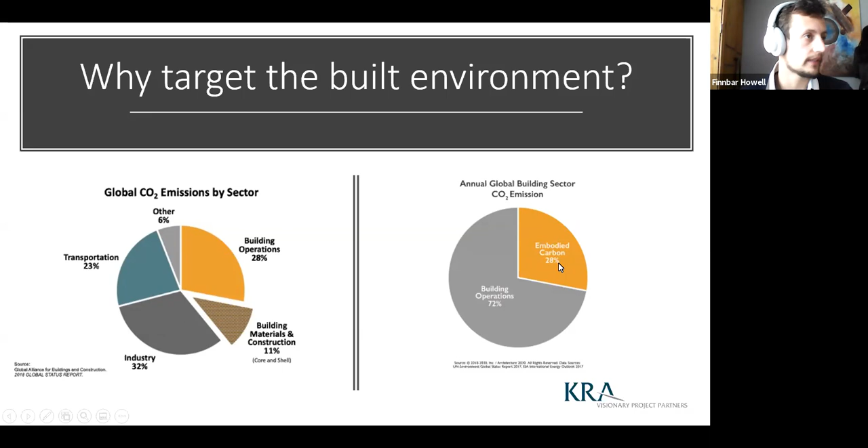So then we're looking at what impact renewables can actually have on this problem. The most important thing is a huge reduction in those operational emissions. And in terms of the macro sense of the problem, that is really what we're trying to do. But we also want it to be positive for all of the players who are involved.

So what else can it do? For the owners and occupiers of buildings, it can mean really significant savings on their energy bills, be that electricity or replacement of gas, or if they're currently using fossil fuels like oil, replacing those. It's typically a lot cheaper to do that through renewables. You're getting your green credentials, which is obviously helping the PR case for your business. You're protecting against the future increase in energy prices.

And the last point I have there, participation in energy markets. What I essentially mean by that is when we input renewable energy, we don't always control the way that it produces power, and sometimes there's a mismatch between production and consumption. So what's really important is that we'll then be exporting that energy to the main grid usually, and that means we're now a player in that energy market. For big users, when feed-in tariffs come in, that's going to be significant revenue streams, and how we're buying and selling power is going to be really affected by renewable energy.

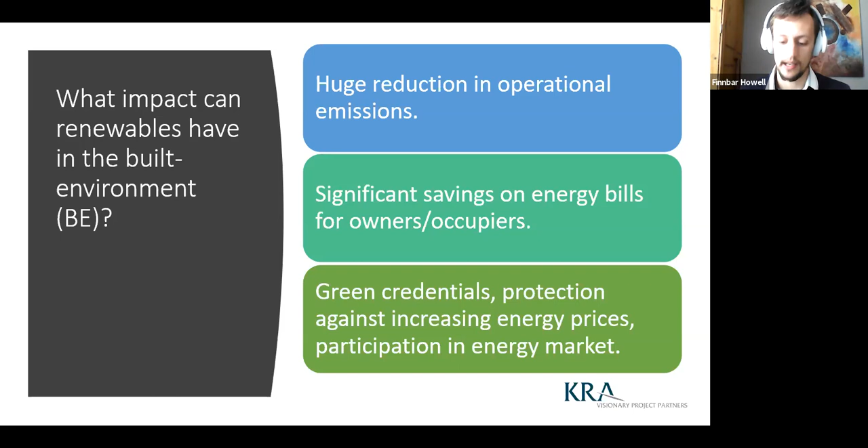So the next question then is just how we go about doing this - what technologies are there to implement these changes? There are a lot of different kinds of renewable energies, but for the ones suitable for the built environment, we basically have geothermal, biomass and its products, and solar power. Before we dive into those, a lot of people will ask, well, what about wind energy?

Wind energy is a really fantastic technology. It's doing great things to decarbonize the global electricity grids, but with the scale that it operates at, the technology and the economics don't really work for built environment specific installations of renewable energy. Likewise for a couple of other things such as hydropower and things like that.

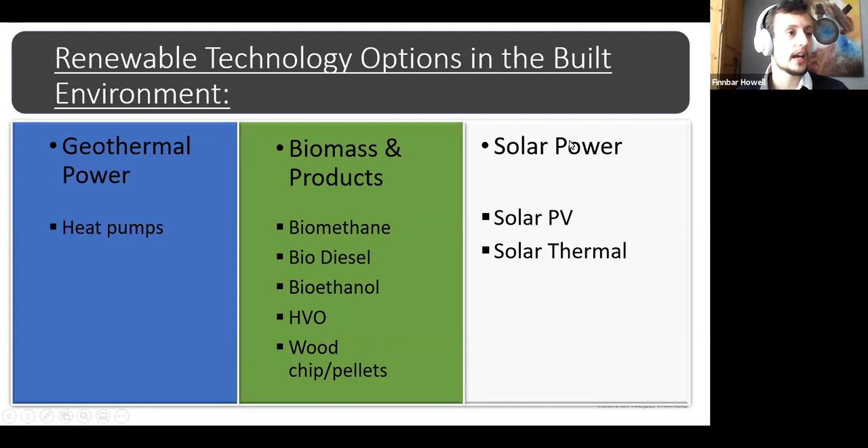So essentially we have geothermal, which we're going to be talking about primarily through heat pumps. There's also the possibility of vertical geothermal boreholes, but they're very case specific, so I'm not going to dive too deeply into those. Biomass and its products can be the replacement of gas, diesel, petrol, or other things. And then solar power, which we're mostly quite familiar with.

So let's start with heat pumps. What is a heat pump? To a lot of people it's just a random buzzword being thrown around a lot these days, or you might not have heard it at all. So essentially, a heat pump is kind of like an inside-out fridge.

Imagine a fridge that we're just running backwards, where our house is the inside of the fridge, or our building of any kind, and instead of pumping heat outwards as they do in a fridge, we're just using electricity to pump heat from outside in. So what that means is that a heat pump by itself is actually a very high efficiency heating device. It's not strictly a renewable energy device, and it's not completely sustainable unless the heat pump itself is being supplied with renewable electricity.

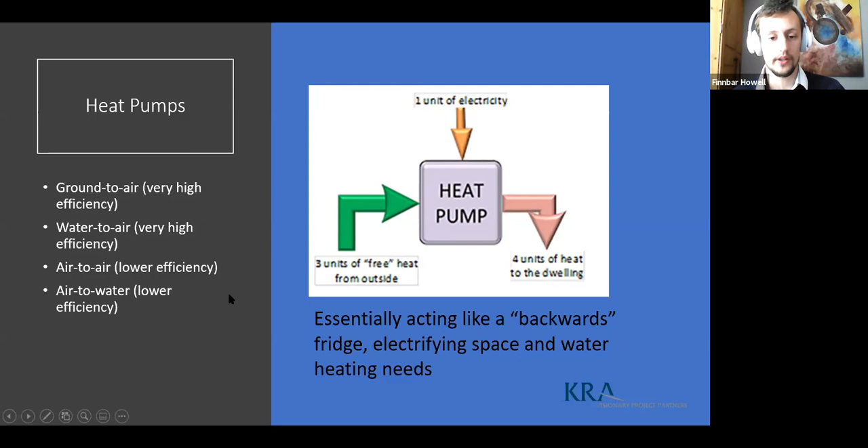So we basically have four kinds of heat pumps: a ground to air heat pump, where the heat is coming from a ground source, a water to air, an air to air, or an air to water heat pump. The first three are all giving you space heating within a building, and the last one's giving you water heating.

So the flexibility of heat pumps makes them really powerful devices, because you can supply both heating and cooling - you can just reverse the cycle, so it's acting like a real fridge. They have been around for a really long time. In Ireland, not so much - the market penetration hasn't been there in an enormous amount - but particularly in the southeast and northeast of Europe, heat pumps are really widely proliferated, been around for a long time, and I wouldn't have any concerns about their effectiveness. As I mentioned, they're a high efficiency device, but they do require a source of power.

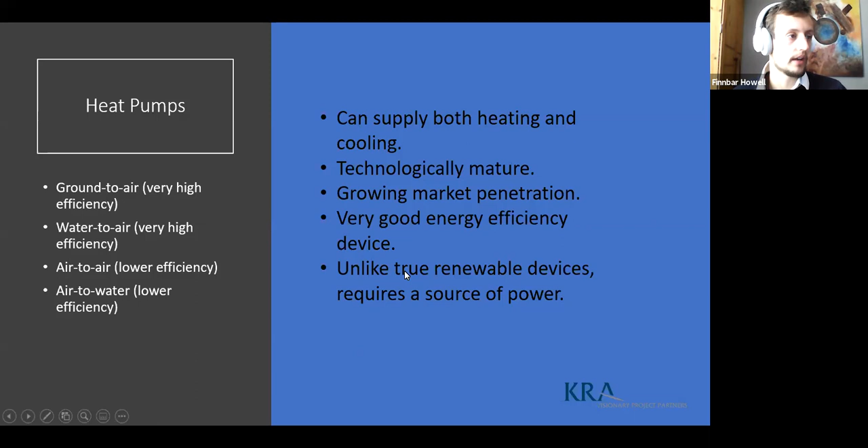So typically people are still mostly going with the air source heat pump. All of these are good devices compared to not having one, but there are significant differences between them. The air source heat pump is by far the cheapest, and that's because of the installation costs. For a ground source, you've got to do a lot of digging essentially.

Water sources can be a really nice mix of the two, where you have relatively low install cost and efficiencies close to those of the ground source, but they're very site dependent. It's dependent on you being close enough to a stable body of water that's not going to be impacted by you messing with its temperature very much.

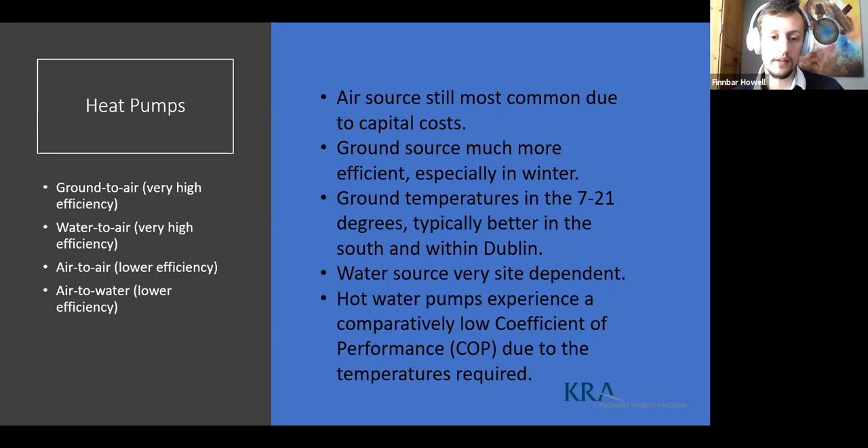So then water heating pumps - because we have to raise the internal body of water to a much higher temperature than we typically need for space heating, they're lower efficiency than air heating for space heating heat pumps. However, they might have advantages because your tank of water will then stay hot for a long time. So if you use those to heat your water, you don't need to use the water straight away, whereas if you use space heating, obviously you can't store it - your building just gets hot.

So then moving on to the second option, which is biomass. First of all, let's just have a look at this picture on the right, and I think this is really interesting - it's kind of the main selling point, the story of biomass. So biomass is basically any biological matter. Here's a bunch of examples of it floating around here, from animal waste to actually human remains. I'm not quite sure if that one would ever end up being used in a bioreactor, but it is possible. Essentially, this shows the flexibility and versatility of the idea of biofuels.

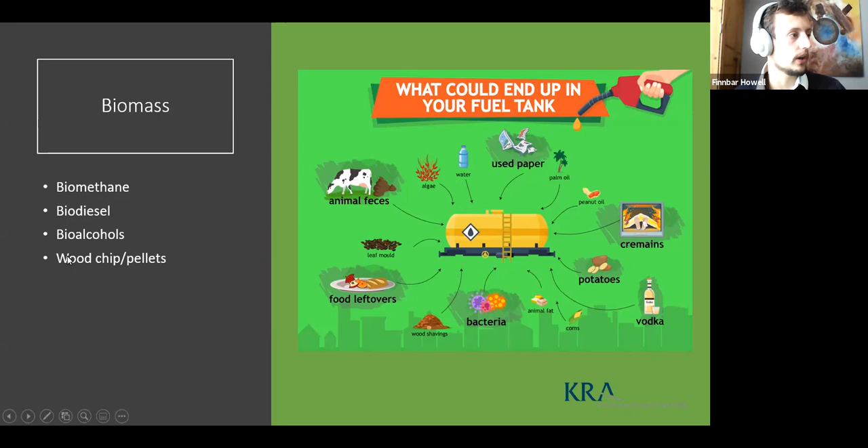So you're trying to use waste products from different industries and streams and turn those into usable renewable energy. Primarily we have biomethane, biodiesel, bioalcohols, and traditional biomass, which is wood chip or wood pellets. So let's just go through those quickly.

Biomethane is upgraded biogas. Most commonly, this is when you take cattle manure or some other kind of manure, and you go through a process called anaerobic digestion in a bioreactor, which essentially breaks it down without oxygen. That releases methane, along with other chemicals which aren't so good to burn, so you have to clean it or upgrade it, and then you get biomethane.

That's chemically indistinguishable from natural gas. In fact, it can have higher purities than natural gas, so it can be completely interchanged into a natural gas burning facility of any kind.

Then we have biodiesel, which is obviously a diesel replacement. This is made through transesterification of fats and oils, usually called HVO. This differs from biomethane in that it's technologically mature, but you never end up with such a clean product. At the moment, this can only be blended to a maximum of about 10 or 15% purity without affecting the engine quality itself.

So I would say it's only an option where there's no other choice but to continue using the diesel engine, and you just want to green it up a little bit.

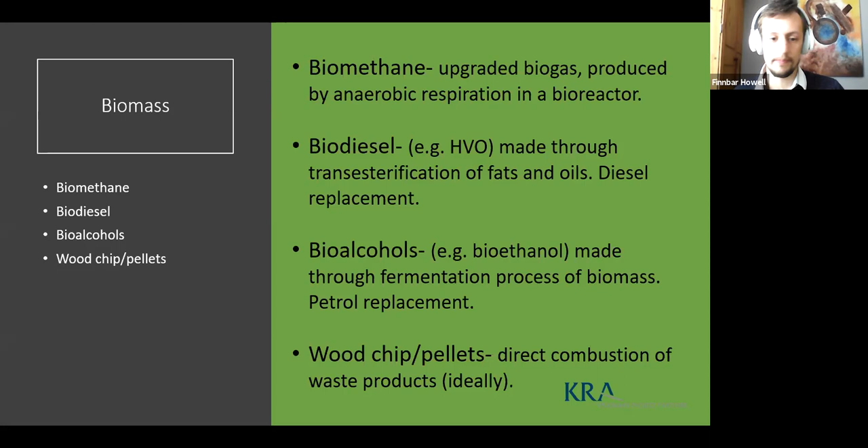The important thing about biomass that a lot of people don't really understand is the idea of carbon neutrality, because for a lot of people, they'll look at this and say, okay, we're still burning something and still emitting CO2 when we do. How is this helpful? How is this better than fossil fuels?

The key thing to take away is the source. The source is what's really important. Fossil fuels initially all started as plants themselves, and they sequestered carbon from the atmosphere when they grew. They went under the earth and stored it in fossil fuels millions of years ago.

So the problem is that when we burn fossil fuels, we're restoring the carbon level towards what it was like millions of years ago and adding carbon to the entire cycle. And millions of years ago, the earth was in a state that we couldn't possibly live in now.

But for biomass, typically that carbon has been sequestered in the last, say, 2 to 50 years. So by burning that, we're not affecting the cycle, and additionally, we can replace it with more plants that will sequester the carbon again. So it's not a problem. The net carbon emission from biomass is zero.

I say it's not exactly zero because obviously there are emissions associated with transporting and processing, etc., but very close to zero. As I said before, the source of the biomass is really a crucial environmental factor.

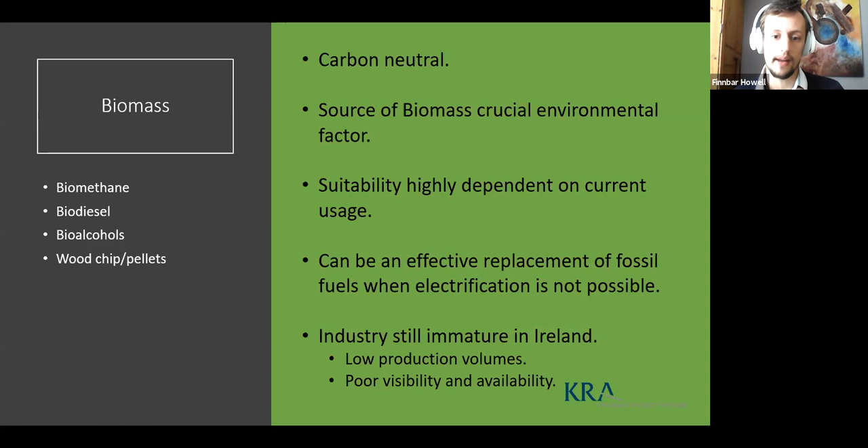To a lot of people, biomass sounds complicated and strange, and they're not sold on the idea. To give you an example of how low our production volumes are, we currently have 12 production facilities for biomethane, compared to about 7,000 across Germany. So that's the scale we're looking at. But it's going to grow, and there are some really good biomass business networks, like this one, growing specifically to target that.

Moving on to solar power, which a lot of people are more familiar with, but it's actually quite misunderstood. It's the obvious fit for the built environment because we typically have underused roof space, and it's very technologically mature. The first solar panels were built 60 years ago, and since then they've gotten more robust, better at doing what they do, and much cheaper.

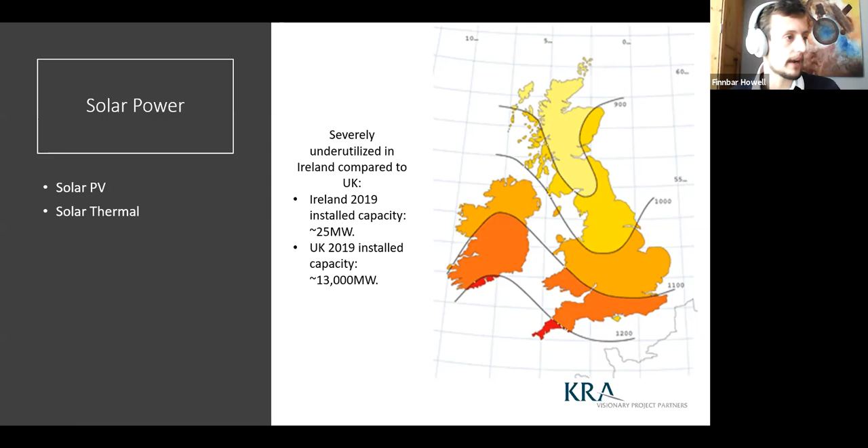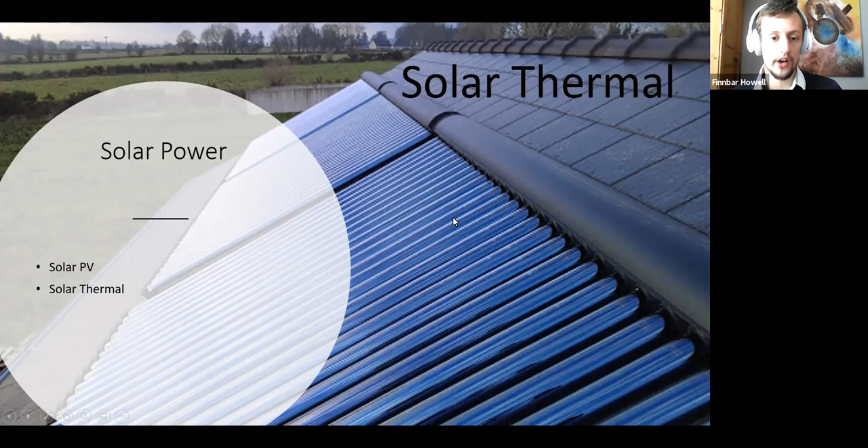There are basically two kinds of solar power. The first is solar thermal. You've probably seen these a lot, particularly about 10 years ago. In Portugal they have a different kind of solar thermal. Typically it's just the big silver tank you see on a lot of people's roofs. In southern, hotter climates that's appropriate, whereas in northern, colder climates with more diffuse sunlight, you have to have evacuated tubes. These convert the sun's rays directly into water heating, which gets piped straight into your house.

It's a really economic solution for water supply because the conversion efficiency of these, particularly when new, is super high - 70% of all the energy falling onto an evacuated tube solar thermal system goes to heat, which is an incredible conversion efficiency. We're seeing a lot less of these in recent years, mostly because solar PV is competing for market share and for roof space, and PV has gotten so much cheaper, so people are opting for PV instead of solar thermal.

I'd say solar thermal is still a really good option where there's high hot water demand, which realistically is most buildings. There is some operation and maintenance required - every 5 to 10 years you have to replace the fluid within these evacuated tubes. For the solid silver ones we see in southern latitudes, that isn't required, which is an advantage for those.

Moving on to the other option of solar energy, solar power, which is rooftop PV. Solar PV, which can be rooftop as we see in this example, is actually an installation that KRA Renewables managed, or a solar PV facade.

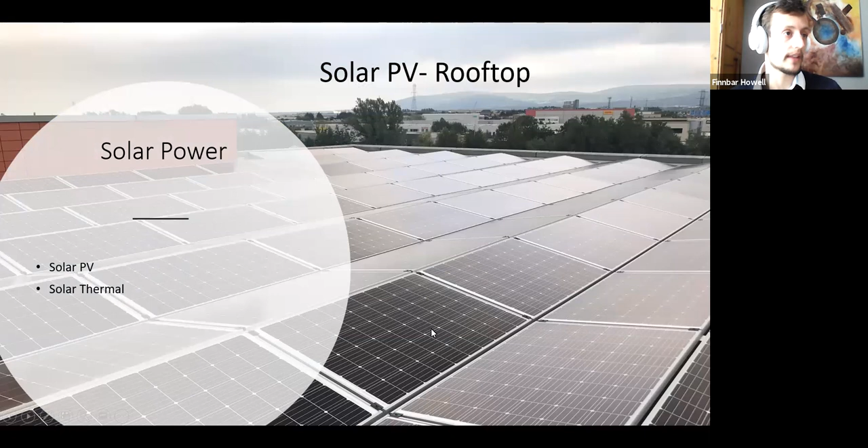The advantage to the rooftop is that it's a simple and quick install, using space you wouldn't use for anything else. The advantage to a facade is that facades are already very expensive, and the difference in cost between a regular facade and a solar facade is actually quite small proportionally. It also produces power for you, and a factor that isn't given much consideration is that it's very visible. Your rooftop PV typically can't be seen by customers or anyone you work with, whereas a solar facade is very visible, front and center, and displays your green company image well.

So how does it work? We won't go too deep into the physics of this because it can get quite complicated. But essentially you have a special type of junction in here, called a PN junction.

Solar energy falls onto these cells. You typically have 60 or 72 of these cells making up your solar module. The solar energy falls in, it liberates an electron from the back contact, which goes up to the top, gets carried away by the circuitry, and then is electricity. So that's a very quick description of quite a complicated technology.

So the idea of solar is that it's very modular. You put together a bunch of these cells that make a module, a bunch of the modules that make a string, and a bunch of the strings that make your system.

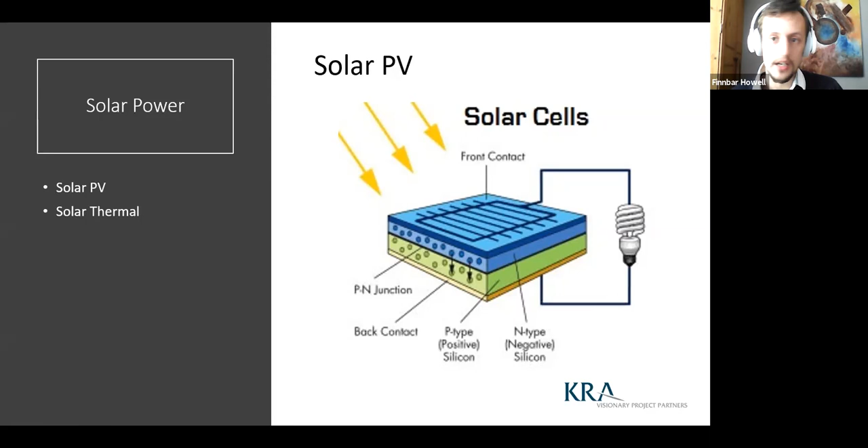So what does a typical layout of that kind of system look like? A very simple layout: we have sunlight falling on our PV. Our PV produces DC, or direct current electricity. Now that's all well and good because it's more efficient to do it that way. But our actual devices in our house expect AC electricity because that's what we get from the grid.

So it has to go through another component called an inverter. If we want to use batteries along with this, we need a hybrid inverter. So it goes to the hybrid inverter, which can exchange power with your battery bank, giving it in or taking it back. It supplies all your AC loads, that's any devices in a building, from residential washing machines to a big electrical heating system, or supplying your heat pumps, etc.

Any excess goes to your meter and to the grid, and if you're using more than you're producing, you just take it from the grid. So it's important to note that putting in these PV panels, and this system in general, is never going to affect your ability to use power. It might affect your choices a bit when you use power, but it's not going to affect your ability to do so. It's not going to interrupt your work.

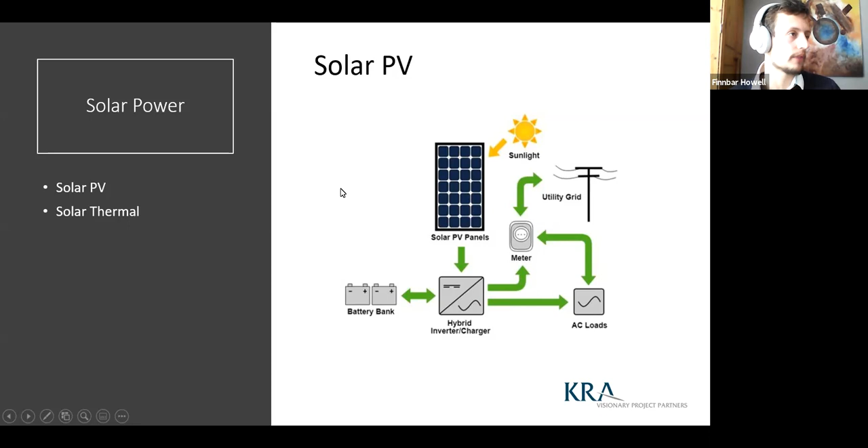As we said, it's very modular. We put together strings of modules, and up to 2 strings can be connected once to an inverter. A string is just what it sounds like, a big line of modules connected in series.

We can design a system to any size, and when I say that, I mean any size. A PV system can hypothetically be as small as 5 watts, which is not enough to power a light bulb, all the way up past the gigawatt range. You could supply Ireland with a single PV system, hypothetically.

The module efficiency is constantly growing with time, and the current market average is around 17 to 19%. So some people look at that and they go, that seems terrible, that's so low.

I'm losing, say, 80% of the energy. And I would say, technically that's true, but that's actually not that important, because what matters is the cost per unit of energy that you actually get compared to how much the technology cost. So 17 to 19% doesn't seem that great, but when you think that the most efficient actual power plants in the world are only about 40%, you go, okay, well, efficiency is a complicated story.

So 17 to 19% is not actually too bad. There are modules with lower efficiency than this, they're a lot cheaper. I would say it's not really worthwhile going for those, just because the efficiency drop means quite a lot of difference in power. And then there are modules that are significantly higher efficiency than this, up to about 23, 24%. But the cost of those is currently so high that it's not worth the extra cost to go for those. So let's say this is kind of the sweet spot.

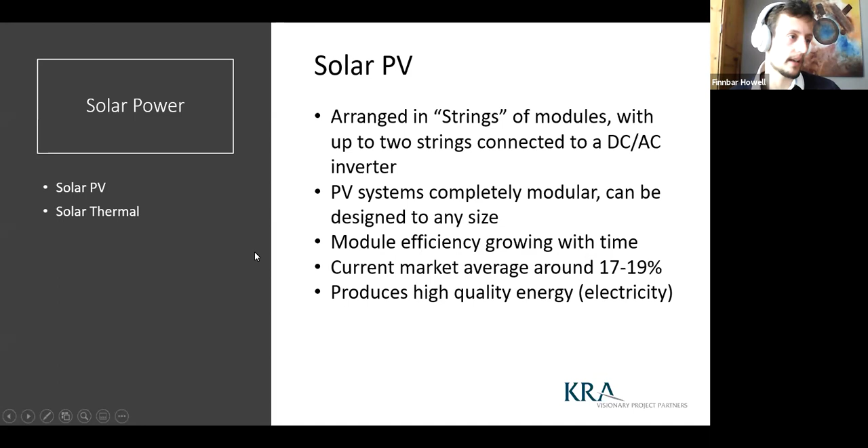So as we mentioned before, you can put this in tandem with a battery system. That's basically to spread out your supply time, and that means you can use green energy even when you're not producing it. Batteries are quite expensive though.

So a more economic solution might be to use what's called a diversion controller. This essentially takes any excess that you're not using at any one time and sends it to heat your hot water tank, or an immersion heater or something like that.

Basically, the most economic way to use a PV system is self-using and preventing grid spillage. This is doubly the case in Ireland, where we do not currently have a feed-in tariff. It's expected to come in this year, but with the whole COVID crisis, it could be 2021 or maybe even 22.

It is important to say that there are a lot of things that affect how much your PV system is actually going to output in terms of energy yield. Those include the tilt, the orientation, the shading, the string layout, as well as your choice of components and how they're combined together. So having someone who knows what they're doing involved is really, really important.

For the case of domestics, where it's just a small amount of modules going on a roof, a local installer is fine. But if you're looking at a big commercial building, I wouldn't just go with your Joe Soap electrician who's retrained as a solar installer. Rather get a renewable energy engineer involved. The cost of having them involved will really be worth it for the additional energy yield and robustness you get out of the system.

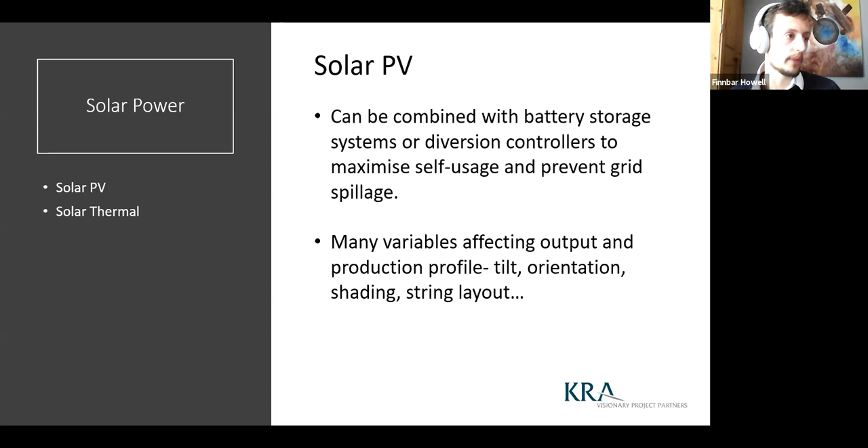It is important to say not all systems are equal. If you put a system up on the roof in the wrong way or using the wrong components, you could have enormous drops in output compared to what you're expecting.

It's a very safe technology, but if it was installed incorrectly, there are problems that could happen, which include, for example, affecting the building integrity. So you don't want to put modules onto a roof where the roof can't hold it, or placing PV modules right underneath a chimney stack where the shading of the chimney will affect the PV modules, because that will affect the production of the entire PV strings and therefore the whole system.

So yeah, not all systems are equal. There are a lot of components available. It's quite a flooded market now, and there are thousands of producers of PV modules, with a lot of different guides out there to different kinds of ones. But a lot of people, when quoting a system, will say our modules are tier 1 modules, and most people assume that is a quality mark of the modules.

That's actually not what tier 1 means. Tier 1 is a financial metric about the producers of the modules, made by Bloomberg, and it's not a statement about the actual quality of the modules themselves. Generally, all tier 1 modules are good quality modules, but there are many good quality or premium modules, the kind of best performers in the market, that are not actually tier 1 because they don't satisfy the specific criteria for the Bloomberg tier 1 list.

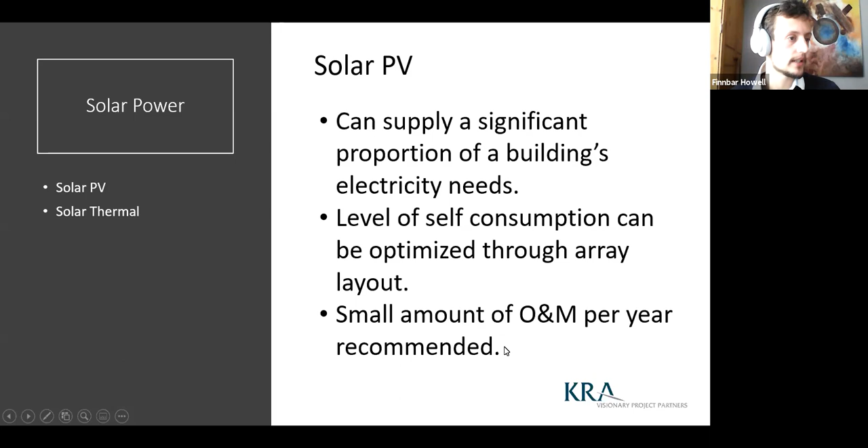So then, how does it work economically? Hopefully I'm doing alright on time, not going over too much.

So economically, we can see that PV is really, really coming down in price, and that's basically from the fact that we're producing a lot more modules and getting better at knowing how to do it around the world.

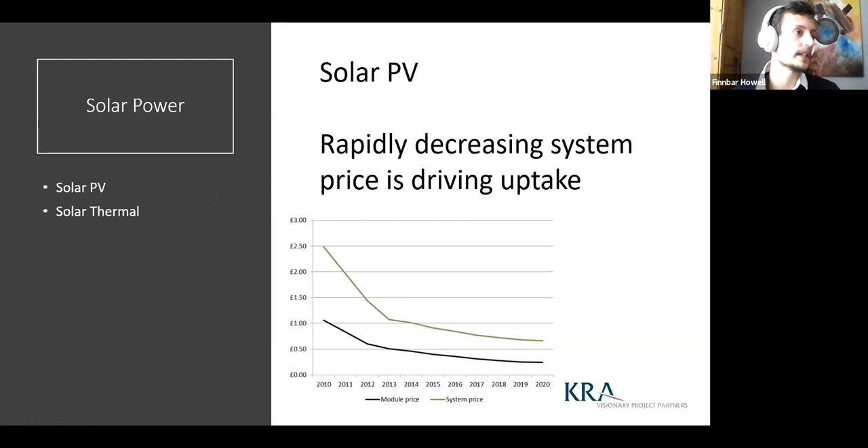Let's take a closer look at this graph. The units on this side don't really matter - this is from an English study, but I just want you to look at the trend. Over the last 60 years we've seen the price of PV modules come down 99%, but let's just take this 10-year period for comparison. This is the actual modules themselves, and you can see they've really come down more than about 60, 70% in that time.

And then the entire system price, which includes your inverters and the install costs as well, has come down very rapidly. We can see in these years that was when a lot of new players were coming into global markets and we were getting better at doing installs, so it got a lot cheaper. The rest of that is kind of just following the decrease in module cost.

It's pretty important to note here that we're getting close to the cheapest it can be, because if this module cost even drops to absolutely zero, you're still going to have this gap, which is based on the people actually going in, putting in the time, going up onto the roof, etc. And that can't really be squeezed any further.

So takeaways from this are that PV is now incredibly cheap, and it's not going to get much cheaper. So now is a really good time to buy, particularly because governments are still offering subsidies for PV across most of the world in one form or another. But the cost is not going to decrease any further, so now might be the best time possible to buy a PV system.

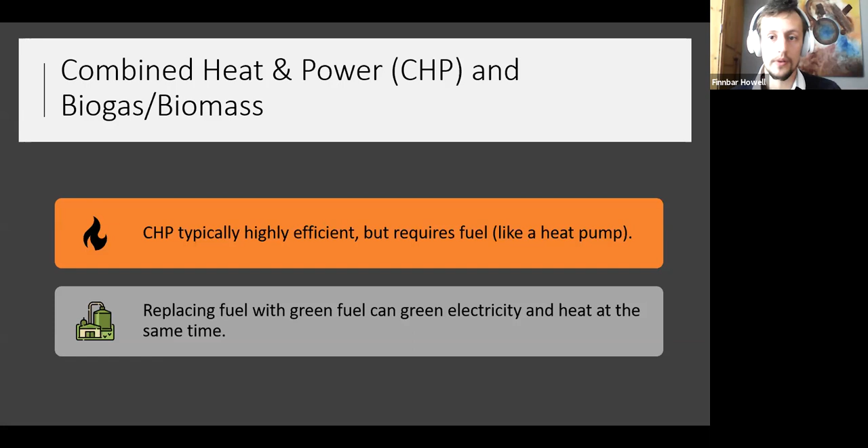That's all on technologies, economics, and some synergies, and I'm just going to round out with a couple of myths. So here's a few nonsense statements that I've heard about renewable energy that I'm just going to debunk for you now: renewable technologies never pay back their embodied energies.

Basically, any time we make anything, it takes energy to do that. That's really important, and we should think about the embodied energy of everything before we purchase things. Some people like to think that renewable technologies take more energy to make than they produce - not true at all. For solar PV, for example, they typically produce the energy it took to make them in 1.5 years out of a 30+ year lifetime. And for a more grid or utility scale solution, commercial wind farms typically pay back their embodied energy within 6 months. So it's just not true at all.

The next myth is that renewables need government support to be economically worthwhile, which kind of implies that they're costing the entire country. This might have been true 10 or 15 years ago. From the kind of graphs that we looked at before, it's very not true today. We all like having grants and support, and we like it making the capital costs cheaper, but it's actually not required to make these worthwhile investments. I'd say that one's definitely not true in the vast majority of cases.

And then the last one, which is one of the most infuriating ones, is that renewables can't replace fossil fuels. The argument here is basically that the sun doesn't always shine, the wind doesn't always blow, and so in those downtimes we're always going to have fossil fuels. I'll tell a quick anecdote to address this: in the 60s and 70s, when these technologies were really coming into being, people were saying renewable technologies would never supply more than 1 to 3% of grid electricity. Then in the 80s they were saying like 5%, and over time they kept saying it'll never supply more than 10%, never more than 15%. Last year in Ireland, wind energy alone supplied 30% of Ireland's electricity need every year.

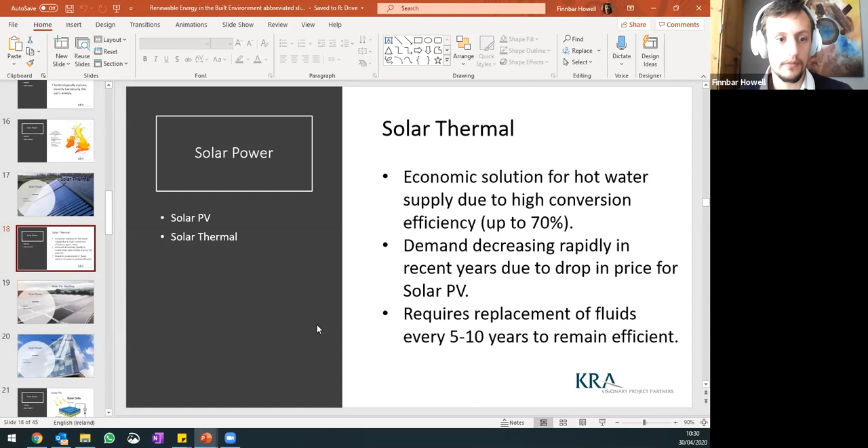Yeah, so it ranges from place to place. For a domestic sense in Ireland, we're normally spending about 20 cents per kilowatt hour, which is very high. For commercial, it could be anything from about 7 or 8 cents, where it's very, very hard to make the economics work for you, all the way up to maybe 22 cents, where it's a gold mine. So it very much does depend on what price per kilowatt hour you're looking at for buildings.

The problem is that in Portugal we have cheaper energy. So because the equipment is also more or less the same price, we have a longer payback, normally 8 to 10 years, and that is the problem. If consumers have some doubts, that will make it difficult.

Sure, yeah. I understand that 8 to 10 years can put a lot of investors off in terms of a payback period. I would say that after those 8 to 10 years, you are just getting an enormous amount of your power basically for free.

One of the arguments I would employ to convince investors is about the increase to future energy prices. Because even if you assume energy prices go up just 2% per year, throw that into a calculator, 1.02 to the power of 30, so that's over that time, you're looking at nearly 100% increase in those energy prices.